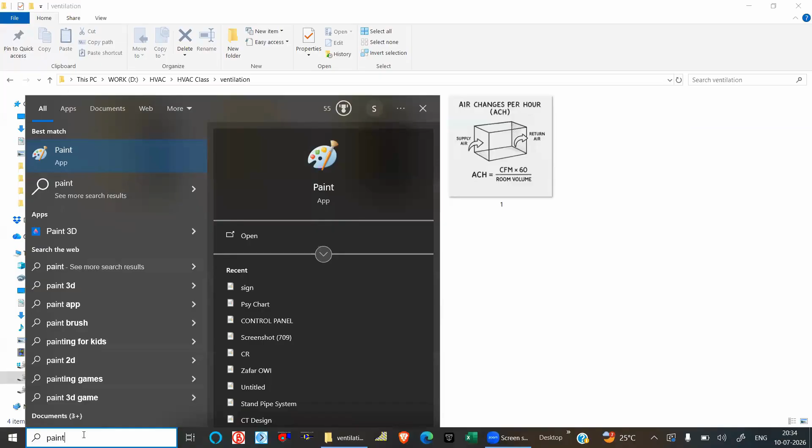Of ventilation, okay. So let me just give some little brief about the ventilation. So what do you mean by ventilation?

We are living inside a closed environment, whether it's air conditioning in your houses, commercial buildings, shops, or even non-air conditioned areas like toilets, kitchen, or car parking in the basement. These kind of places require constant change of air. We have to change the air inside these places because of various reasons.

For example, if we close the entire room, the doors, windows, everything, but if there are very few people, it doesn't matter much. But generally in higher occupancy, you will feel a little suffocated. The reason is because if the air is not coming from outside continuously, there will be a decrease in oxygen levels and you will not feel comfortable. There might be some smell that has to go out, or some odor, or various reasons.

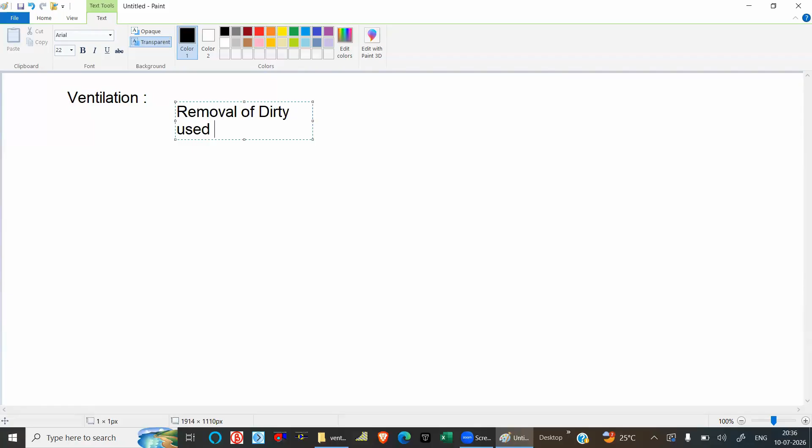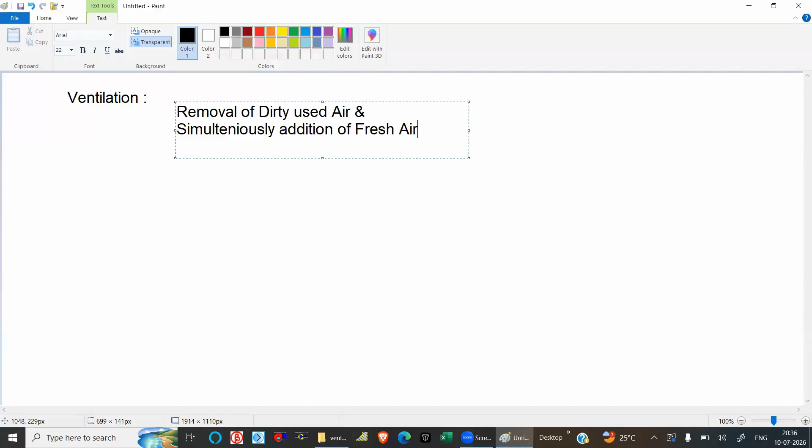So ventilation simply means the removal of exhaust, or the unwanted, dirty, used air, and simultaneously addition of fresh air. Simply, this is called ventilation. The removal of the exhaust air we remove outside is called exhaust, and the air we take inside from outside is called fresh air.

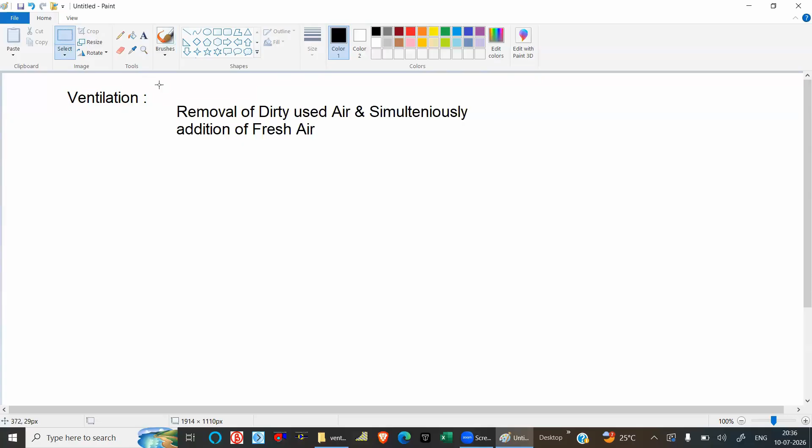Ventilation can be done even in air conditioning as well. We have seen in the heat load calculation that we are calculating the fresh air CFM. Exhaust, whether we are doing it or not, depends on certain cases. Not every air conditioning requires an exhaust. So that is called ventilation.

Ventilation also helps in reduction of temperature in summer climate or hot outside conditions. Because inside, what happens due to various reasons, as we've seen in the heat load, is heat gain within the room - internal heat. That is the heat gain because of equipment, and the heat gain because of people.

Because of these reasons, heat rises inside the room. So if you're taking an exhaust, we are also removing the heat from the room a little bit, not much - maybe around 3, 4, or 5 degrees Celsius we can reduce. So ventilation is also used for removing heat, up to a very certain limited level.

So where are the places ventilation is required? The most common place is the toilet, right? Because in toilets, what is there? Smell. You have to remove the smell from the toilets, and we have to give provision, or add fresh air from outside. So there is ventilation in toilets.

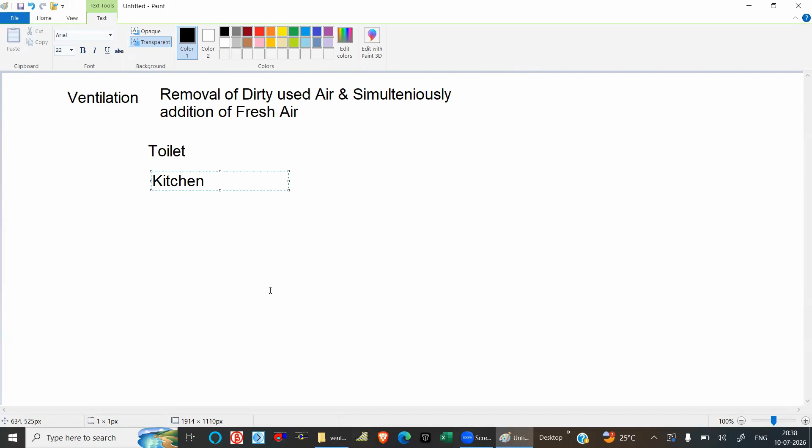We also need ventilation in the kitchen, because in the kitchen again we have smell, we have smoke. We have to remove the heat, or remove the water vapors. So those things have to be removed from the kitchen. That also requires ventilation.

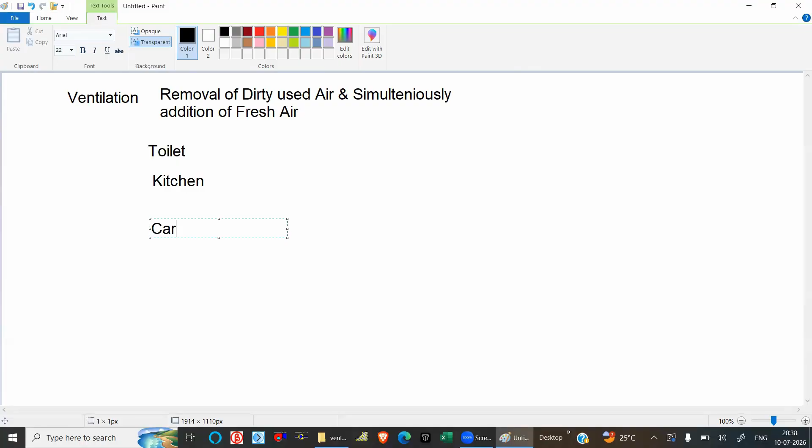Another place is car parking in the basement, because we have to remove the exhaust from the two-wheelers and four-wheelers, so that place also requires ventilation: toilet, kitchen, and car parking basement. These are the most commonly used places, or the common places where we require ventilation.

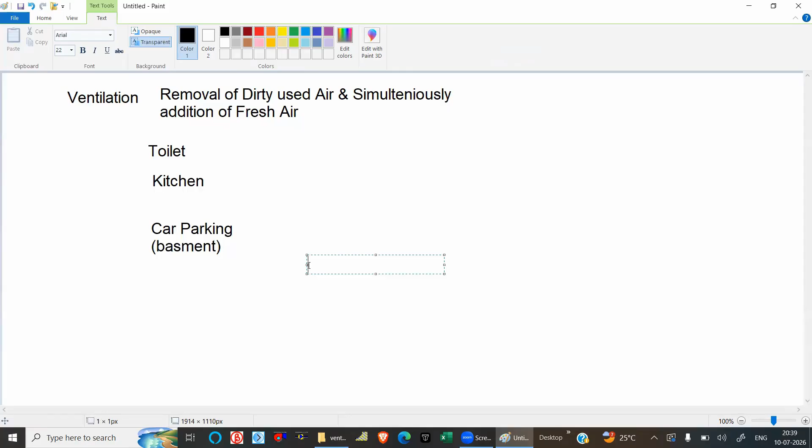But apart from that, there can be some other places as well. I'll give you some examples that are not generally required, but yes, in certain cases they are. For example, UPS and battery room - in commercial buildings there are a lot of UPS units and batteries kept together, so they generate heat.

And also a little bit of smell as well. So if they are not going with a dedicated air conditioning system, then we can plan a ventilation system, an exhaust fan from the room. Another example is the washing machine room.

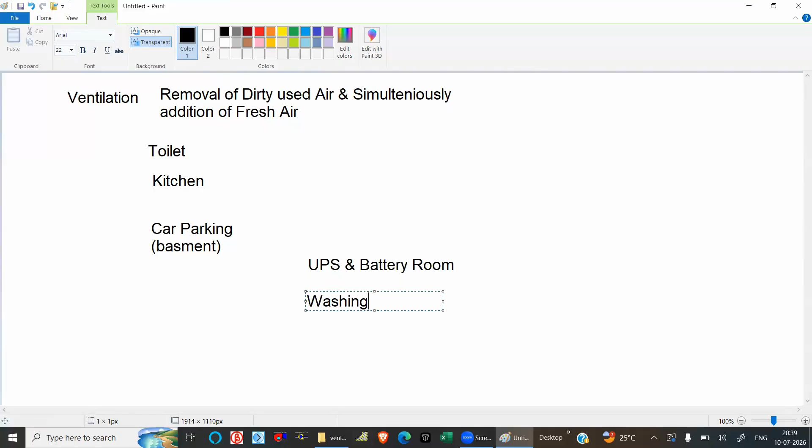For example, in certain hospitals, they keep a lot of washing machines together and use hot water to wash the bed sheets or clothes of patients, and they use a lot of detergent. So there will be a lot of smell because of the detergent and water vapors coming from the hot water. So that place also we can go for ventilation.

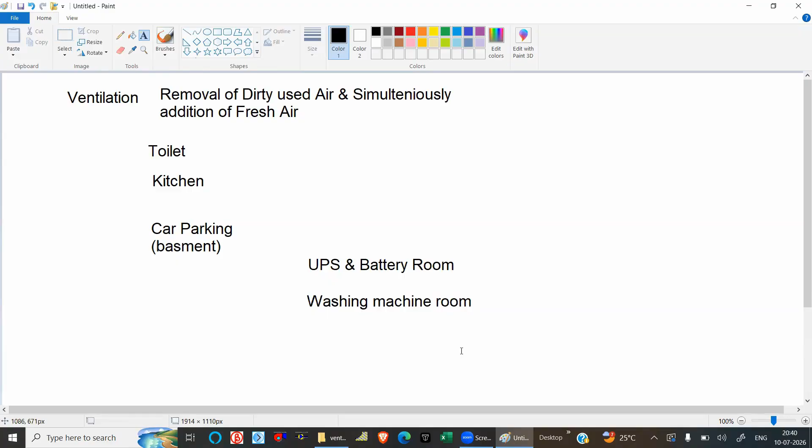So ventilation can be used in many places, but the most commonly used places inside any commercial and residential building are these three: toilet, kitchen, and car parking. Is it clear, guys? Out of that, we are going to see toilet ventilation first. But before that, one more thing we have to know.

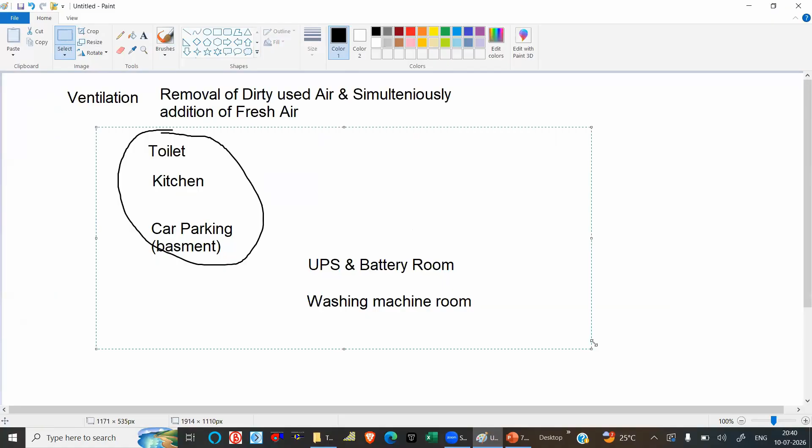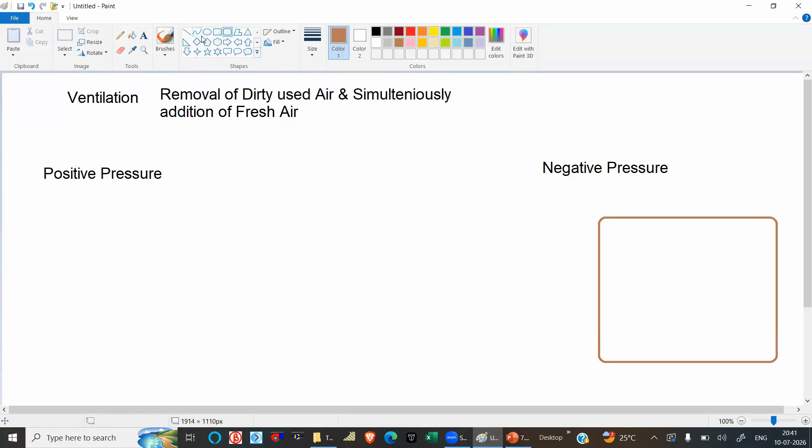In ventilation or even in air conditioning, there is a concept of positive pressure and negative pressure. What does it mean? I'll give you one simple example. Suppose I have a room, a bedroom, and in some corner I have a toilet.

Whenever you open doors or windows, some amount of air transfer happens because there is a change in pressure. Generally, when you open windows opening outside, you can feel air coming inside. This is because the pressure outside the building is slightly higher, due to winds, temperature, and other reasons, so we feel the air coming in.

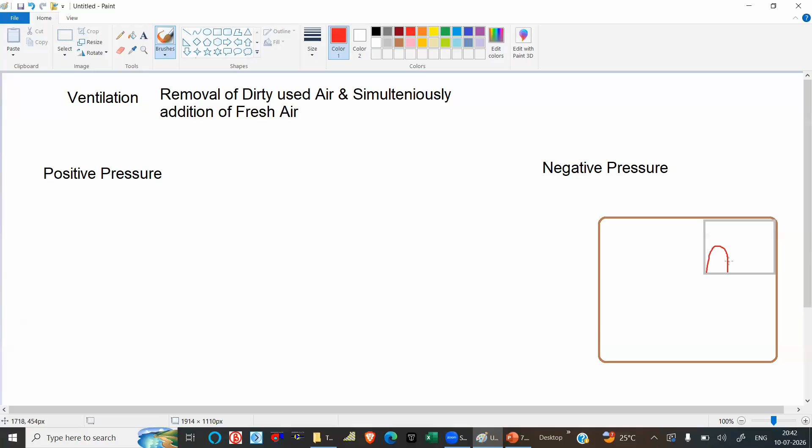The same thing happens if you open a door between two rooms. If the pressure in one room is more, air will come from room one to room two. Suppose I have a bedroom here with a door, and a toilet door somewhere here. If someone opens the door, which is the best case scenario? Air from the bedroom going to the toilet, or air from the toilet coming to the bedroom?

We want negative pressure in the toilet. So almost all ventilation systems need to provide negative pressure. What do we mean by negative pressure? It simply means the exhaust should be greater than the fresh air, or we can say the return should be greater than the supply.

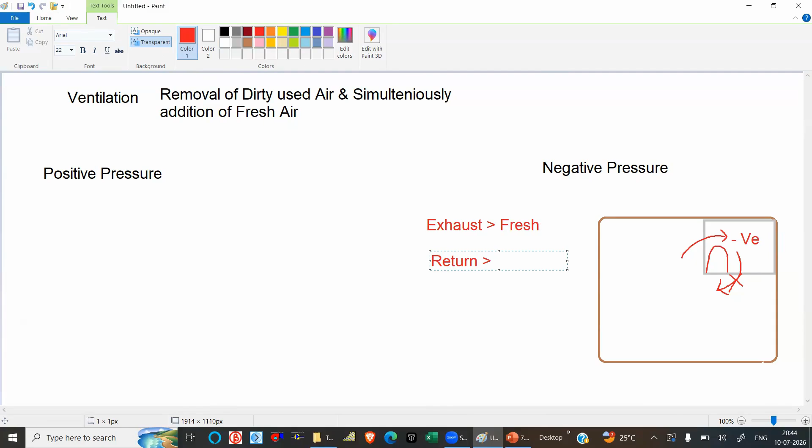How does it happen? Suppose from this toilet I'm removing 100 CFM, and through some opening or duct I'm providing 80 CFM. So there's a difference of 20 CFM - I'm removing more and adding less. If the door is open, both rooms try to reach equilibrium, so this 20 CFM tries to rush in, tries to come inside. This is how we maintain the toilet at negative pressure. The reverse will not happen because the exhaust is already more.

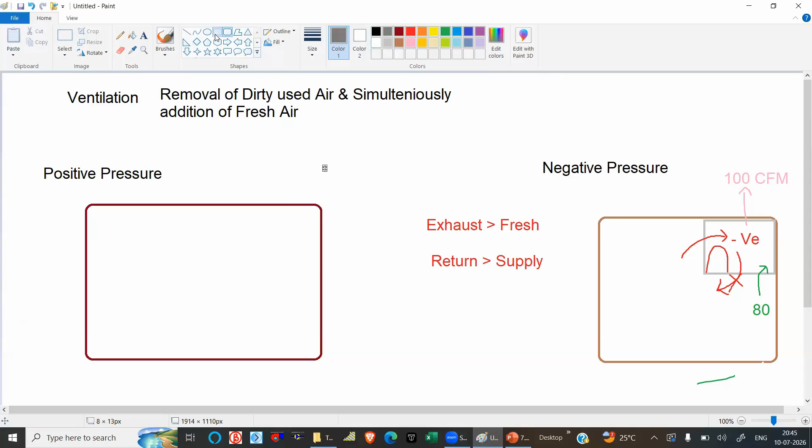Now let's take an example of positive pressure. Suppose there is a hospital, and here I have an operation theater, an OT. This is a general ward, and here also we have a door. Now tell me, which is the best possible scenario - air from the general ward entering the OT, or OT air entering the general ward?

We have to see where the air is cleaner. The cleaner air will be in the OT compared to the general ward. So in the OT we maintain a positive pressure compared to other areas. It means we are providing more CFM.

For example, suppose I'm providing 100 CFM here, and removing just 80 CFM. So there's a difference of 20 CFM. When the door is open or there are leakages, the air tries to move outside instead of coming inside, because this room is more clean - the air coming into this room passes through more filtration levels. This is called positive pressure.

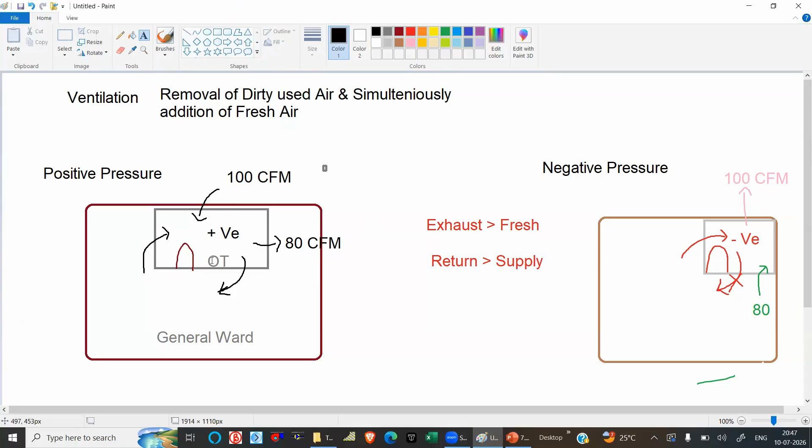In general air conditioning, for such places we go for positive pressure, and for ventilation we go for negative pressure. Again, if it's a very biohazard level area where they are testing or there can be diseases that can spread, it will be very airtight - that's a different scenario. Just talking about the general concept here.

Now let's come to the first ventilation, that is toilet ventilation. What is most important in ventilation? We have to find out the exhaust first. Why do we calculate exhaust air first? Because the fresh air can be calculated as some percentage of the exhaust - 75, 70, 80, 85%, somewhere around that. Fresh air can be easily calculated as 80% of the exhaust, or 70%, or 75% of the exhaust. So what we have to calculate is the exhaust CFM.

So how do we find out exhaust? There is one formula, the air changes formula, which we have already seen in the heat load, ACH. The formula is CFM equals length into width into height, meaning the volume. If you keep everything in feet, the volume will be in cubic feet, multiplied by air changes per hour. Air changes, or ACPH, is the number of times you are changing the air inside the room in 1 hour. It doesn't have any unit, it's like 10 times, 5 times, 15 times, something like that - unitless. That is air changes per hour, like 2 times, 100 times, divided by 60.

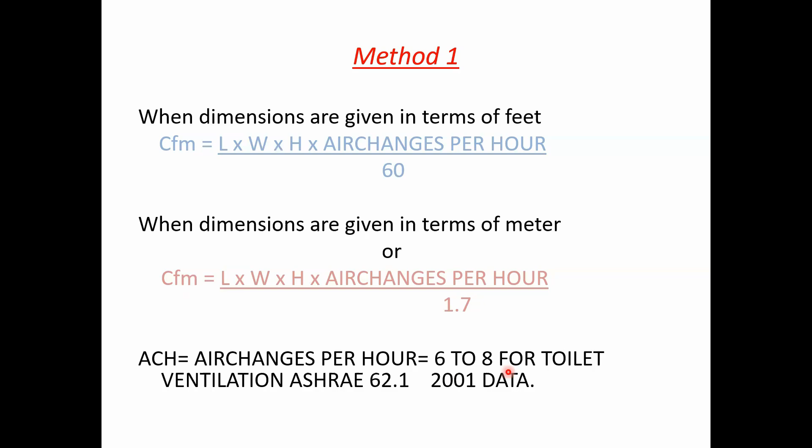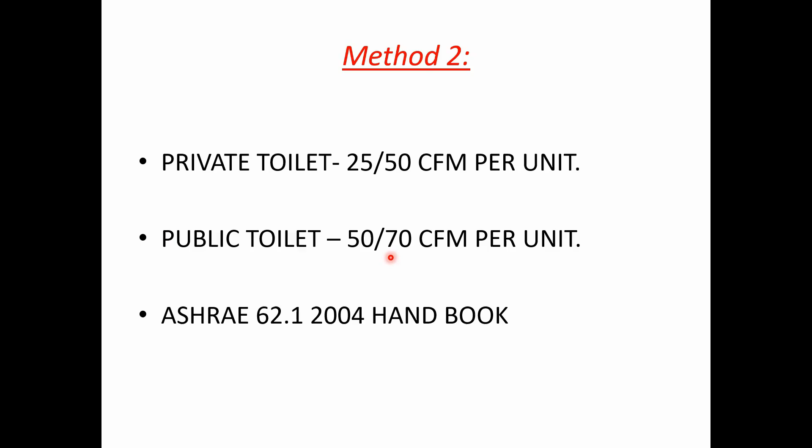So for the toilets, according to ISHRAE and ASHRAE, we generally go for 6 to 8 air changes. But in newer versions, we can go for 10 air changes also for toilets. Another thumb rule is that for private toilets, we can go for a minimum of 25 to 50 CFM per unit, but for public toilets, 50 to 70. No matter how small your toilet is, minimum 50 CFM you have to take, not less than that - minimum 50, up to 70. You can go for higher if the toilet is big enough, though generally public toilets are not very big, but we can go for these values.

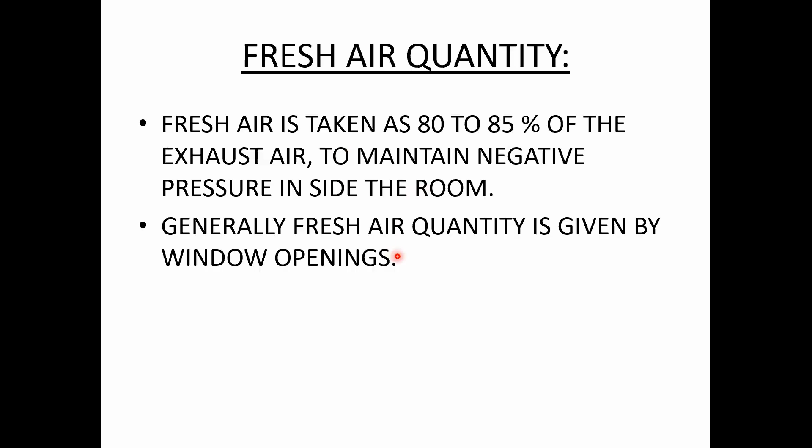Now what about the fresh air? Fresh air can simply be taken as 80 to 85%, sometimes 75% also, of the exhaust air, to maintain negative pressure inside the room. And how is the fresh air given? By window openings, there will be door undercut. See, we have the door undercut - if you've seen in certain malls and different places, the toilet doors will not be up to floor level, they'll be a little above, a few inches above. Why is that? For the fresh air to come inside. That is called a door undercut.

Or we can have a door grill - a dedicated door grill inside the door at the bottom side, which you might have seen in the railways, so that it can also provide fresh air. Or we can go for fresh air in a way that is not very common, very rare, because the toilet space is already small, it doesn't have a lot of space. The space is already taken by electrical services, plumbing, maybe firefighting, or the exhaust duct if you are taking exhaust from the toilets. So there's not much space left for a fresh air duct, but if required, you can go for a dedicated fresh air duct, to take fresh air from the atmosphere to the inside.

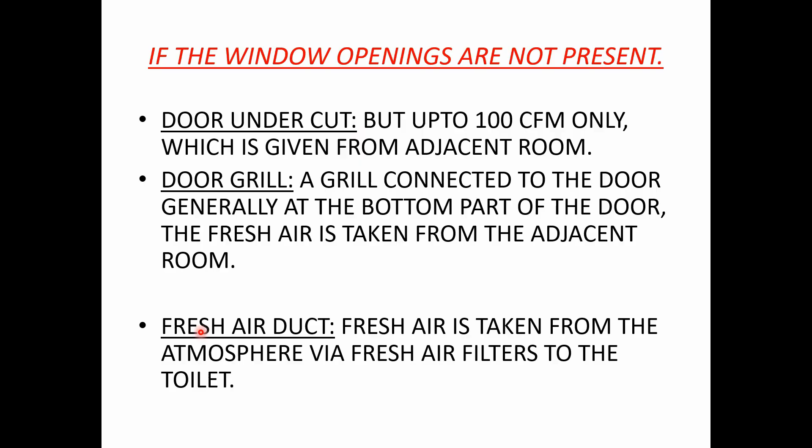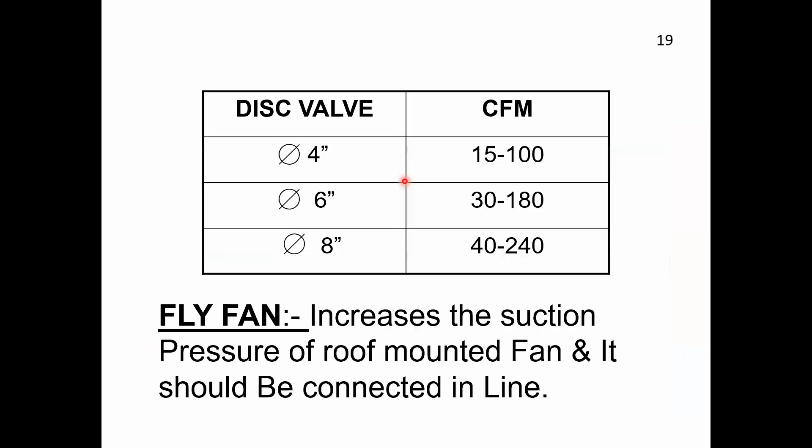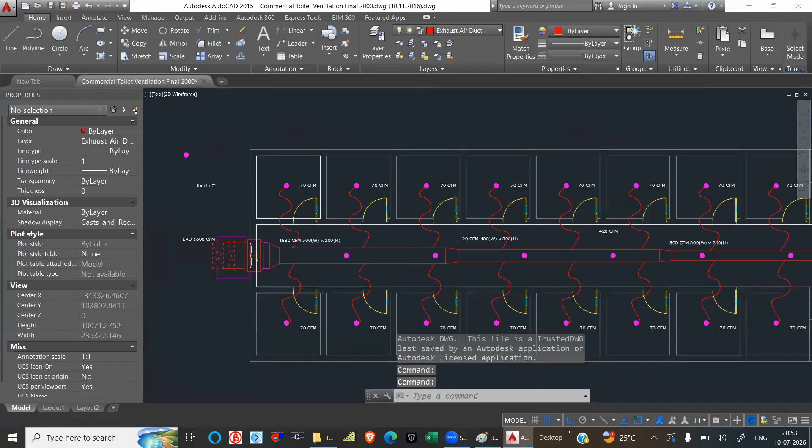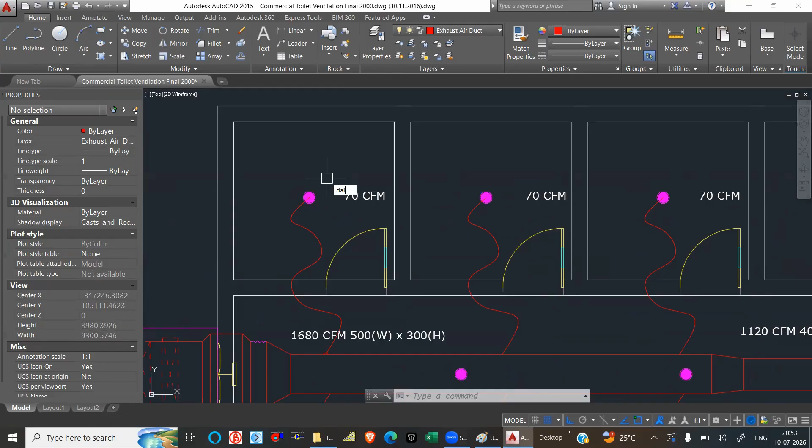Now how is it done? I'll take you through one very simple example - I'll just show you here. Suppose there are a number of toilets here, these are public toilets, so there are so many toilets you can see. First of all, what you have to calculate is the exhaust required in each toilet. For that, you have to find the dimensions first. So what is the dimension of this first toilet? It is 2 meters - 2 by 2, I think. Yeah, it is 2 meter by 2 meter. So I'll write it like this.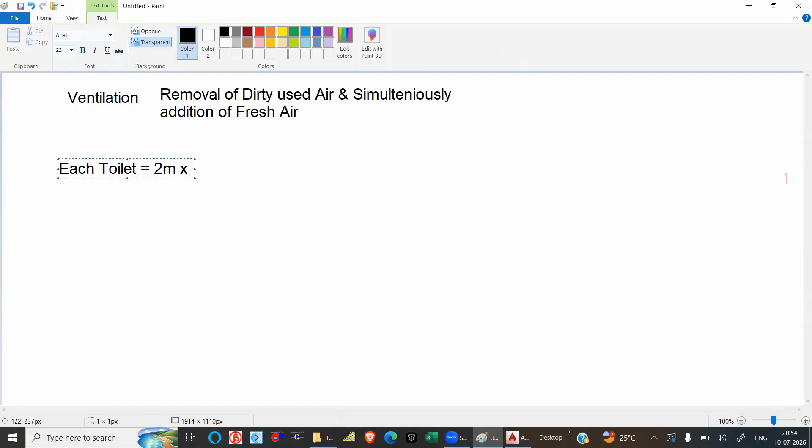Each toilet is 2 meter into 2 meter. Now what about the height? Height can be anything. Let's assume the height is 3 meter here.

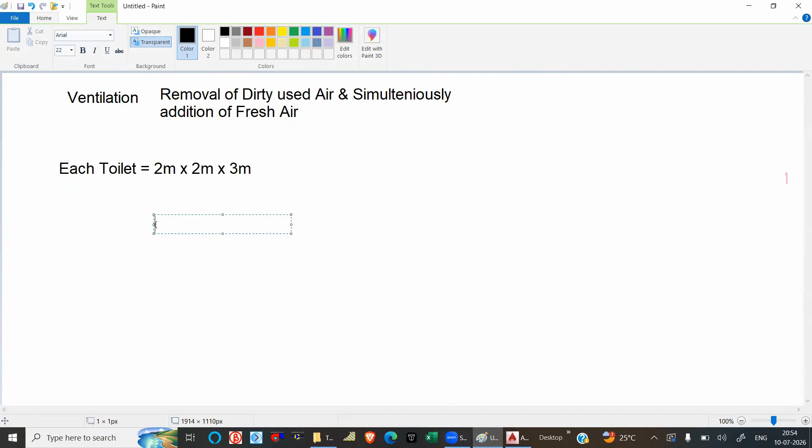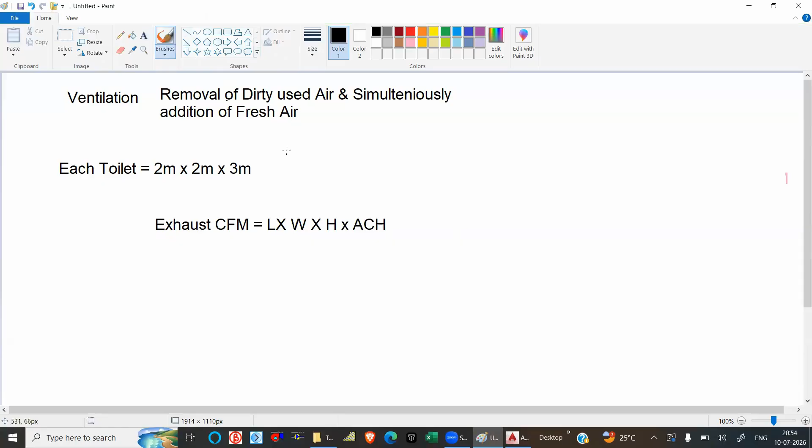Now by the formula, exhaust air CFM is equal to length into width into height into ACH or ACPH, that is air changes, divided by 1.7 because here we are doing in meters. So how much is it? 2 into 2 into 3 into air changes 10. You have to take 10 air changes divided by 1.7.

Okay, so how much is it? Do the calculation in your calculators. 2 into 2 into 3 into 10 divided by 1.7. Again, it is 70.58, so it is 70 point something.

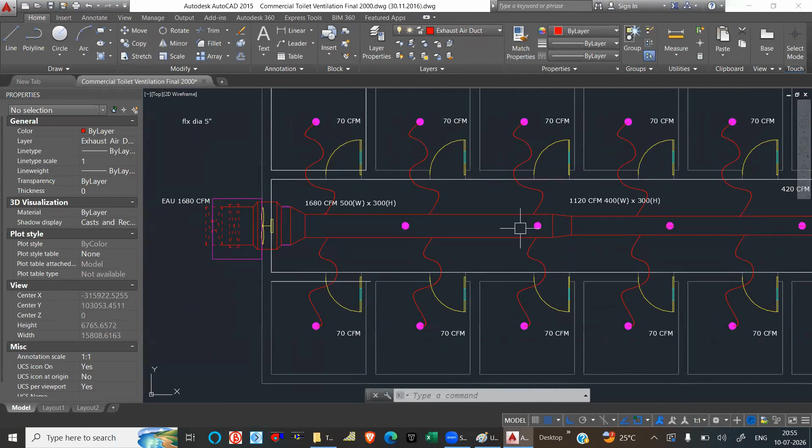So approximately I'll take 70 CFM. So let's say each toilet requires 70 CFM. So simply I can consider all the toilets require 70 CFM. Now what about the passage area, the corridor?

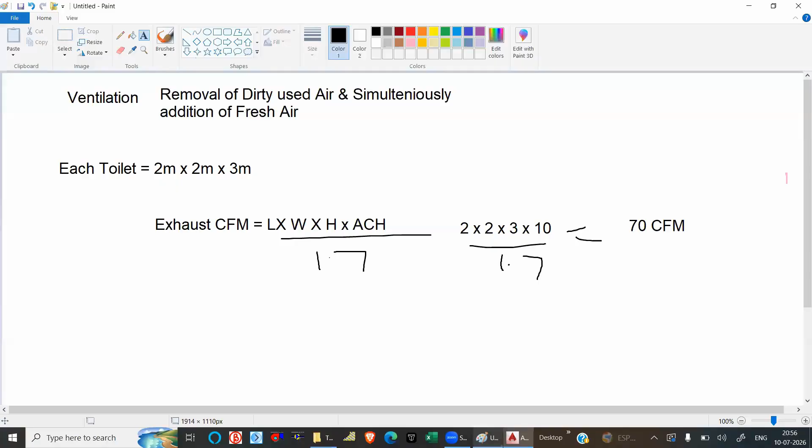Sometimes in the corridor there are urinals, wash basins, urinals. So those places also have some amount of smell or odor. So how do you calculate for that? There is one thumb rule actually. You can go with air changes method, but there is a thumb rule that says the exhaust CFM for passage area, for toilet passage, we take 1 CFM

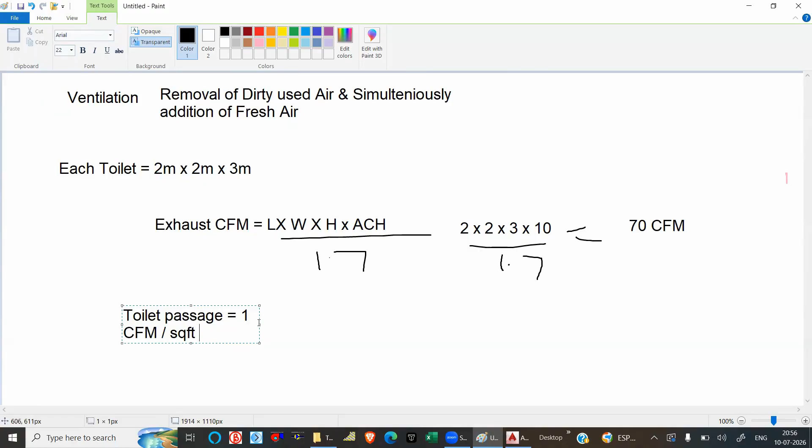per square feet. Whatever is the number of square feet, that is the amount of CFM that you have to add. So in this case, whatever is there, we'll leave it. So how many toilets are there? 1, 2, 3, 4, 5, 6, 7, 8, 9, 18.

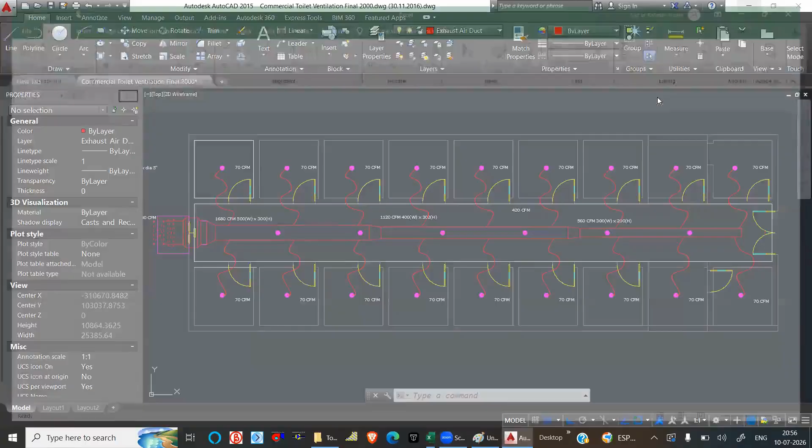So we have in total... I might have written this here. So total are 18 toilets. How much CFM per toilet? 70. So 70 into 18, it is 1260 CFM.

Now what about the passage area? When we calculate the passage area by using the area command or polyline command, whatever, you'll see that in the drafting the passage area is 39.2 square meter. If you convert to square feet, it is 422, so approximately 420 CFM. So total is 1260 for all the toilets and 420 for the passage, which becomes 1680 CFM.

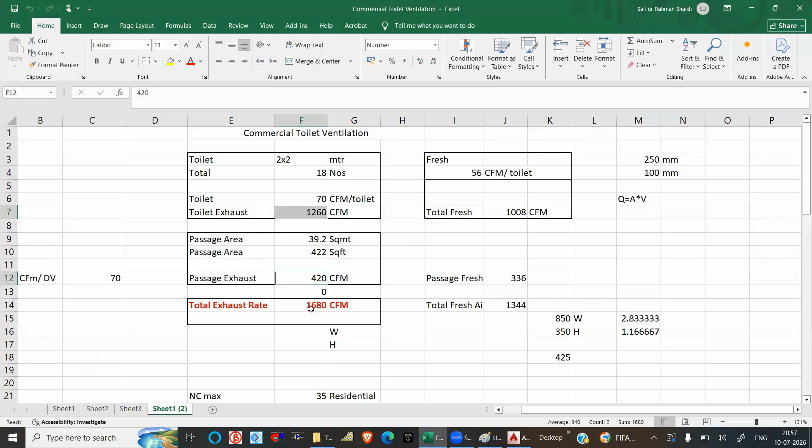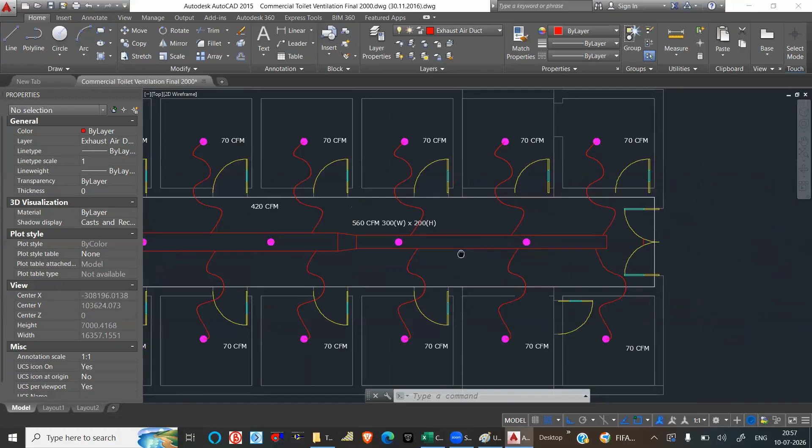So the total CFM required is 1680. So we have an exhaust air unit of 1680 CFM. From each toilet we have to use flexible duct and extract. Then the main duct is also there, and you have to place the disc valve. In each disc valve we are planning to take 70 CFM each. So how do we calculate the disc valve size?

Again, go to your duct sizer. Here you write the flow rate or head loss. Flow rate, how much? 70 CFM. Head loss we can take more, but even if we take around 480-500, which is okay, or head loss 0.1. So what is the equivalent diameter? We are getting 5 inches.

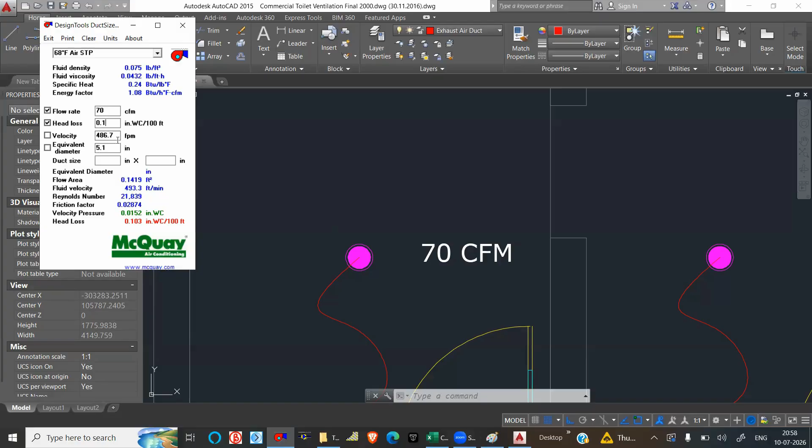Neck size - the exterior can be around 8 inches or something around that, 6 or 8 we can take. So this is our disc valve. Then you have to take the flexible ducts for each branch, and this is your main duct. We'll see in the drafting how we are doing this calculation.

What about the fresh air? Now fresh air, here we are giving the door grills, door and the door grills. This is the door grill, you can see this one. This is the door grill. You have to provide the grill in each door.

Now how to calculate the door grill size? That is by using the beta software, which you have seen in one of the classes. So open this. First of all, convert your background screen to white. Shift Alt and print screen. Then click on beta industrial software. Here click on door grills. Now I'll take Imperial.

Now what is the NC max? The noise criteria 35 as usual. CFM, how much are we planning? 70 CFM. Maximum velocity 450, or we can take 500 FPM. Find the nearest match. So what is the nearest match? I'm getting the size 10 inch into 4 inches.

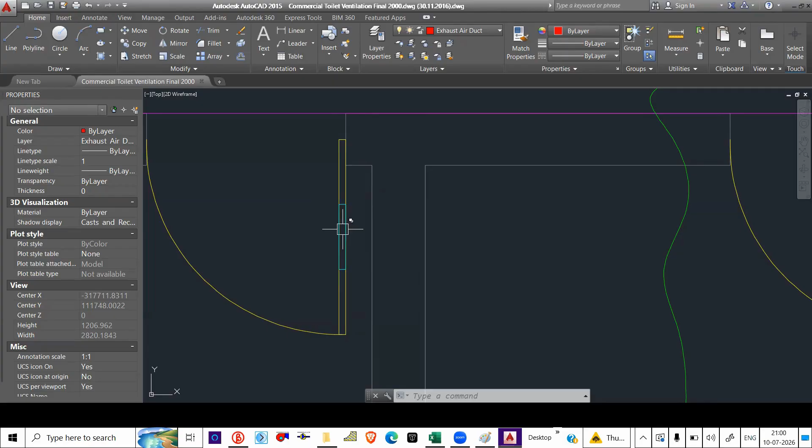So the grill which we are getting here, the length is 10 inch and the height will be 4 inch. And you have to place this here. You can only see the length, you can't see the width here because this is a top view. So width will take the approximate same as the door size, door width. Only the length you can see, not the width - the height you cannot see. So this is the grill size which is required in each toilet: 10 into 4. Is it clear, guys?